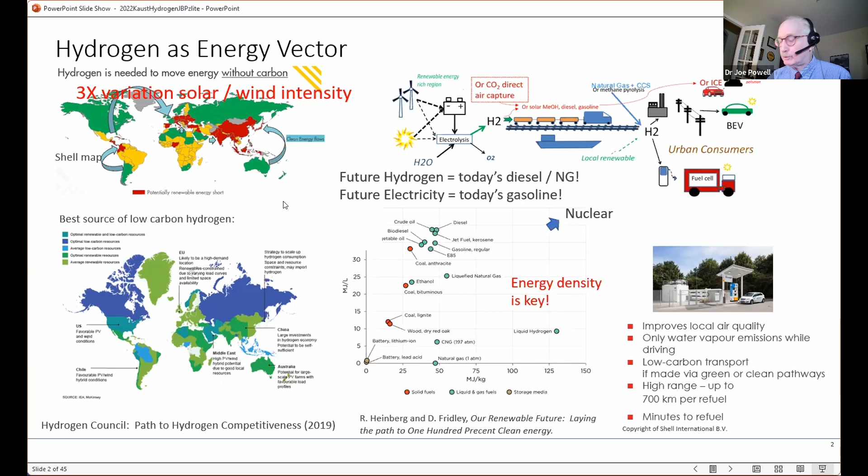So the decision for industry is whether to invest in the blue or the green, and how are you going to move energy into markets. The key point is the energy density of hydrogen and its carriers is much better than trying to move energy, especially the renewable electrical energy, via batteries. So the vector is the key point.

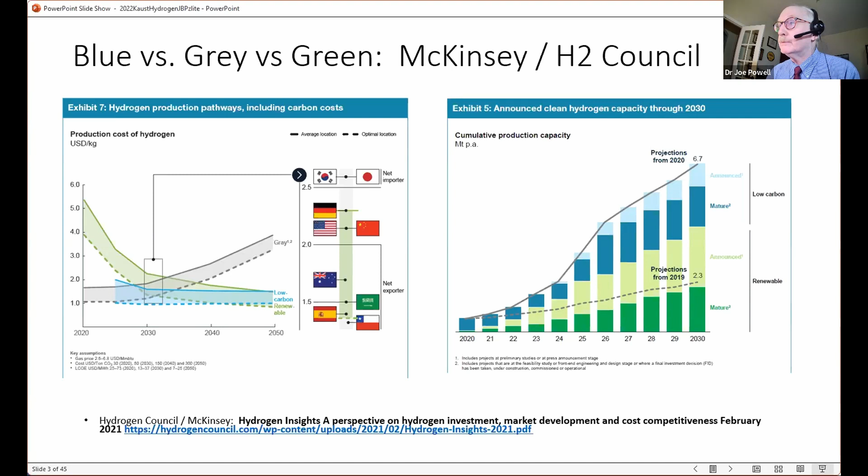So if you look at this 2021 report, on the right-hand side, they are estimating, based on the projects announced, what is the capacity going forward in terms of green and blue as we make this transition into 2030. But the benchmark price there on the left-hand side is $1 per kilogram of hydrogen, and electrolysis may be perhaps 3 times that today, but coming down rapidly. Here's some further breakdowns in the numbers - again, gray on the left, blue in the middle, and green on the right.

And you see that carbon tax coming into play by 2050-ish, according to this analysis. The gray is certainly mature. Blue, natural gas reforming, is mature technology with CCS. And the green is still developing on an S-curve and coming down in cost. So that is the dilemma from the investment side.

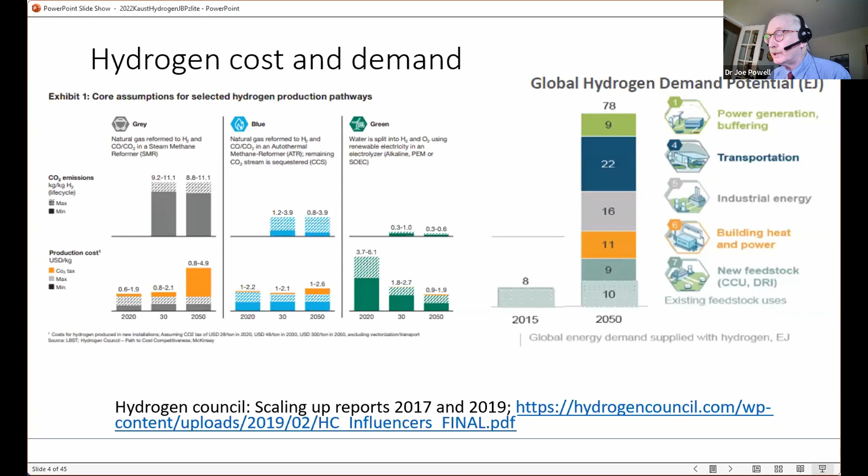On the right-hand side, you see that growth in demand. So again, hydrogen is going after new markets: transport, industrial heating, residential, et cetera. And that explains the tremendous growth anticipated in future demand.

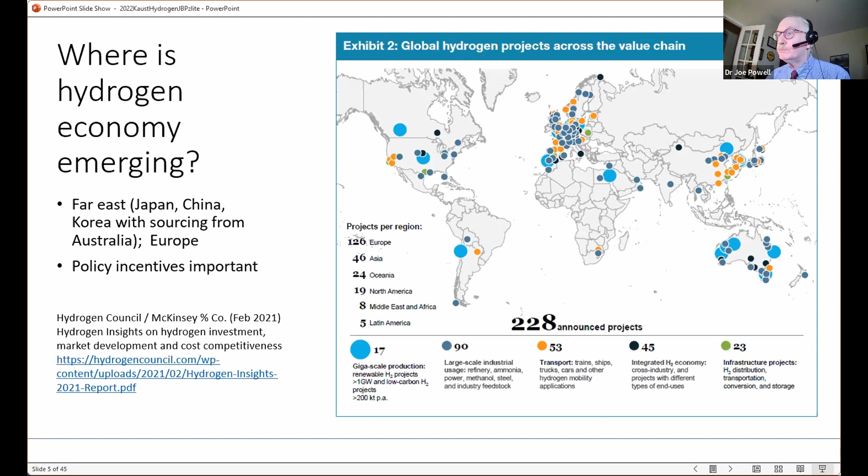This particular publication says 228 announced projects for the year 2021. That may have been more like 370. So there's just quite a bit of project and investment scouting going on in the hydrogen space.

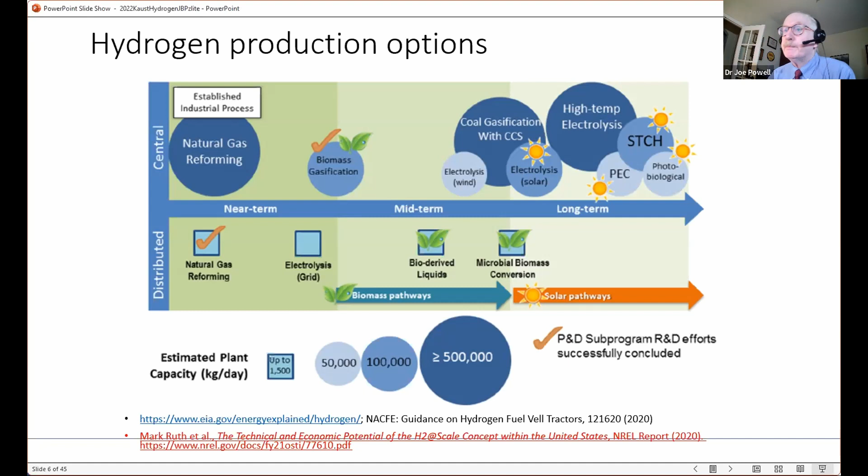Now, I'm going to be talking today about natural gas reforming, biomass and coal gasification—some of these large centralized ways of producing hydrogen today. You can, of course, also make it in a distributed manner, and electrolysis in particular plays out well there. And there are other ways to make hydrogen as well, but we will focus on natural gas reforming and some of the other gasification routes.

Important to keep in mind: it takes less energy to reform or split hydrogen off of methane. In terms of kilojoules per mole, it takes a lot more energy to split water via electrolysis. However, if you're reforming natural gas by steam methane reforming or methane pyrolysis, which we'll talk about shortly, it takes less energy, but you have to be able to sequester or use the carbon into products. We'll also talk about partial oxidation, where you're actually partially combusting the natural gas in addition to making the hydrogen, using that to export energy and provide your process and utilities heat.

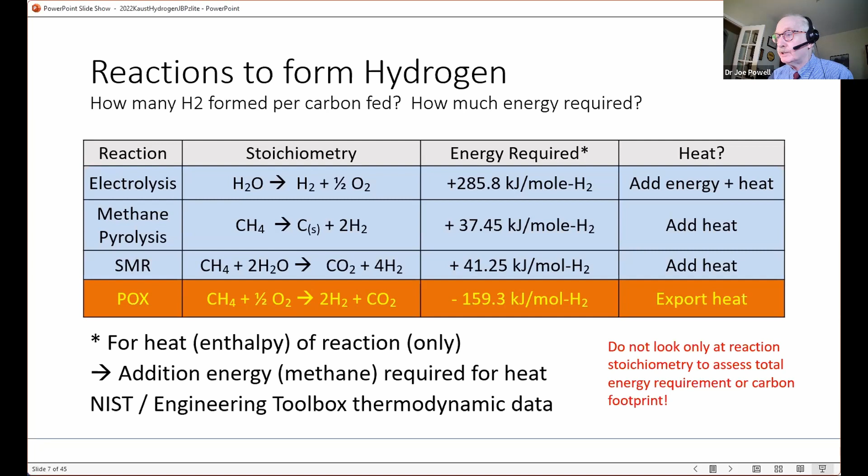Some key references to have if you're working in this space: you want to grab the IEA greenhouse gas report from 2017, which is sort of the standard for techno-economic analysis on steam methane reforming—very good reference there, process from Foster Wheeler. And then also a good one from the United States is this techno-economic potential of hydrogen at scale within the US, which covers the economics of the various plausible routes to hydrogen—very good sources of technology and economics for those routes.

When you look at hydrogen reforming from natural gas, it's essentially a large furnace—a furnace with many tubes running down. So you're really applying natural gas not only to the process side but also to the furnace side of that unit. If you move to something called autothermal reforming, you're actually blending oxygen in with the process side and producing the heat in addition to the process chemistry in an integrated manner.

And then again, if you go to partial oxidation, or what Shell would call gasification, you're adding excess oxygen so that you can not only generate hydrogen but also produce steam and electricity.

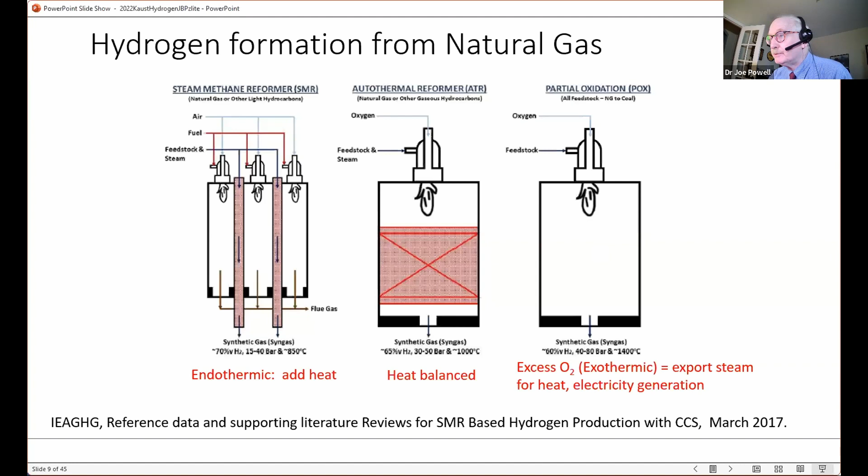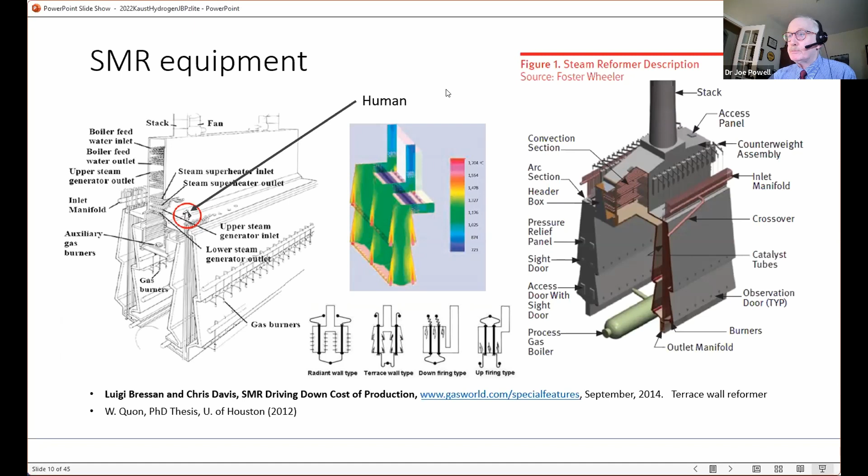So the red circle here shows a person on top of a steam methane reformer furnace. These are huge units. You see some of the temperature profile here and a little bit of what that equipment design looks like. In terms of the tubes, this particular example had 900 tubes, about 10 centimeters in diameter.

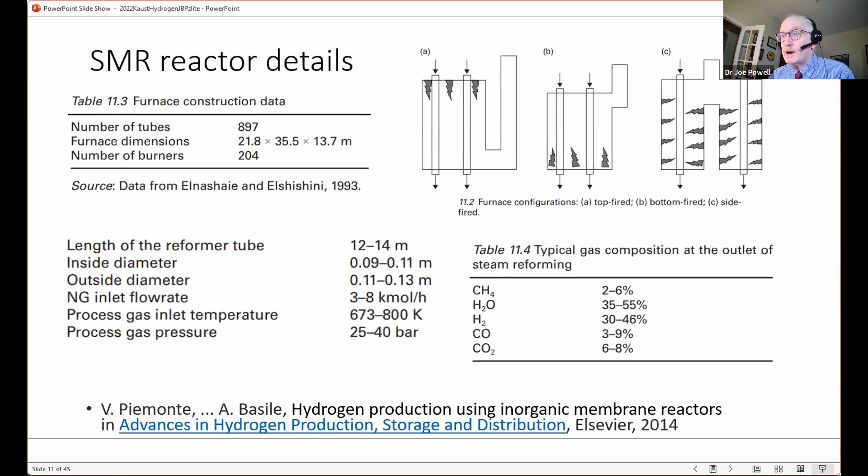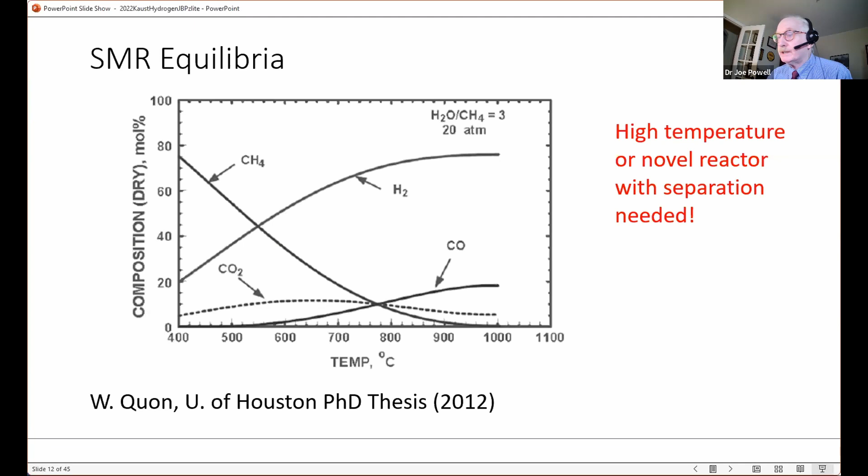And when you're running this reforming reaction, you do leave a little bit of carbon monoxide in the off gas. So you have to run the water gas shift reaction to fully produce all of the hydrogen available from the natural gas feedstock. It's an equilibrium limited reaction, so it needs to run above 750 degrees C to drive to high concentrations of hydrogen, or you have to have a novel integrated separation technique to drive that equilibrium if you want to do a sorption enhanced play or the like.

Catalysts: nickel catalysts are used for steam methane reforming, and then different iron oxide, chromium, or copper catalysts are used for the various stages of water gas shift in order to complete the conversion of the carbon monoxide intermediate over to hydrogen.

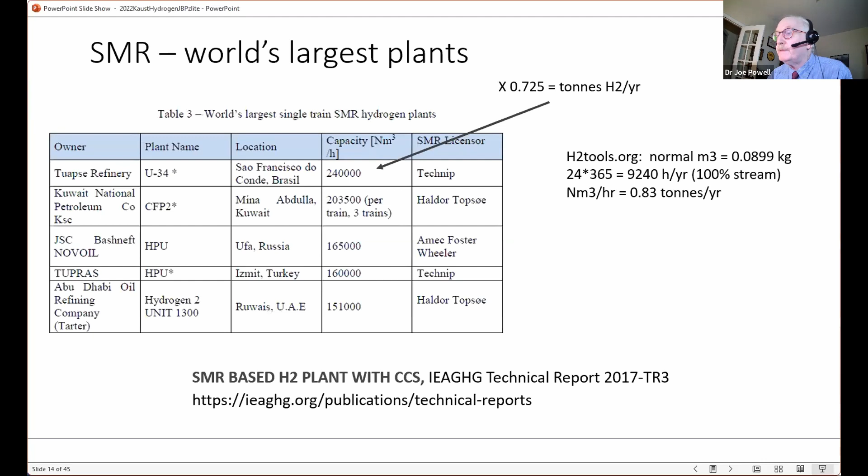World's largest plants—a couple of them in the Middle East, in the UAE, and then also in Kuwait. Here's another one listed in Brazil, Russia, and Turkey, but these are very large scale plants.

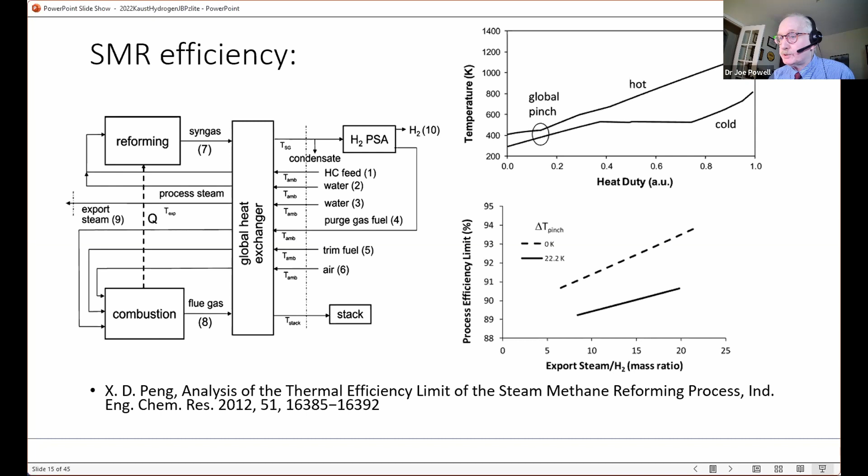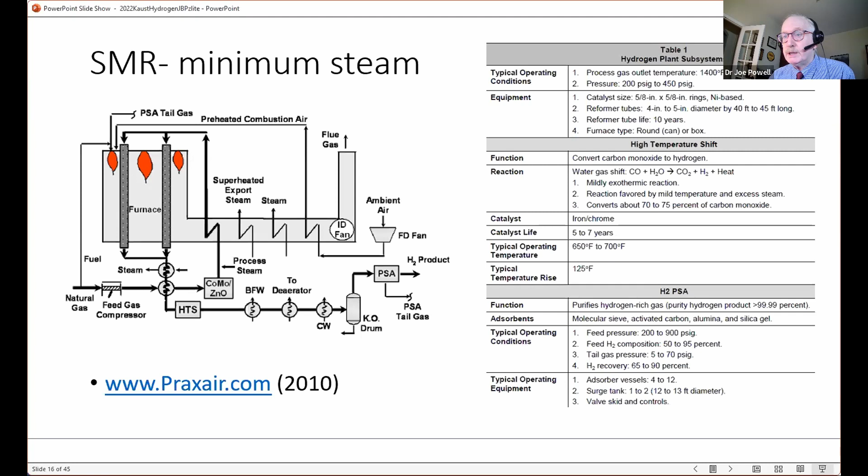One of the best papers—a lot of the cost information and detail is proprietary by the vendors—but a very good paper from Parkinson at Imperial College gives their own estimates of what the various hydrogen cost technologies are, but also compares the literature estimates from the SMR, the gray hydrogen, the SMR with CCS, which would be the blue, coal gasification, methane pyrolysis, but also biomass that I'll talk about today, and then electrolysis. These were the numbers before inflation hit, from about two years ago.

So now you really have to consider the local natural gas prices in more detail, and the dropping prices in wind and solar, in order to make these comparisons. But overall, SMR with CCS is at the lower end of the cost of production.

Here's an optimistic projection for methane pyrolysis. Biomass runs a bit higher and is smaller scale in general. And again, electrolysis is coming down in price because of developments in electrolyzers and improvements in solar and wind power costs. Nuclear can be lower cost, but usually you need to be running sulfur iodine cycle, some of the more complex nuclear technologies, and not the steam reformers.

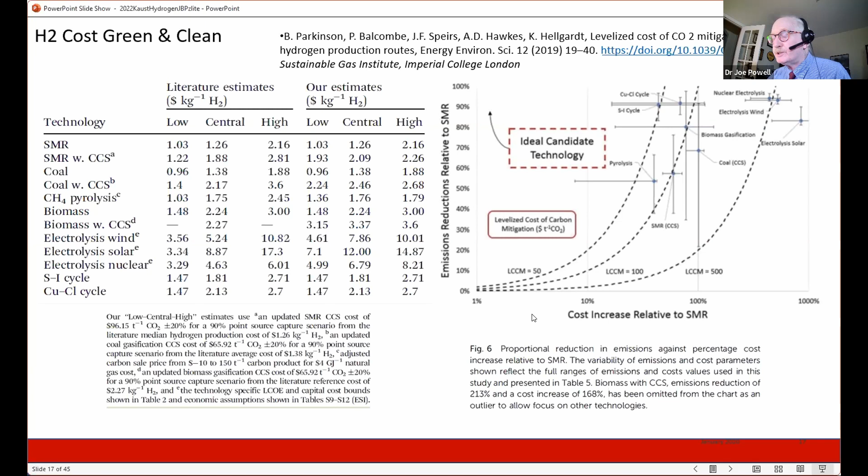These costs are highly dependent on how much decarbonization you're getting. So when you're looking at blue hydrogen especially, you have to ask, well, how much CO2 reduction is coming into play there?

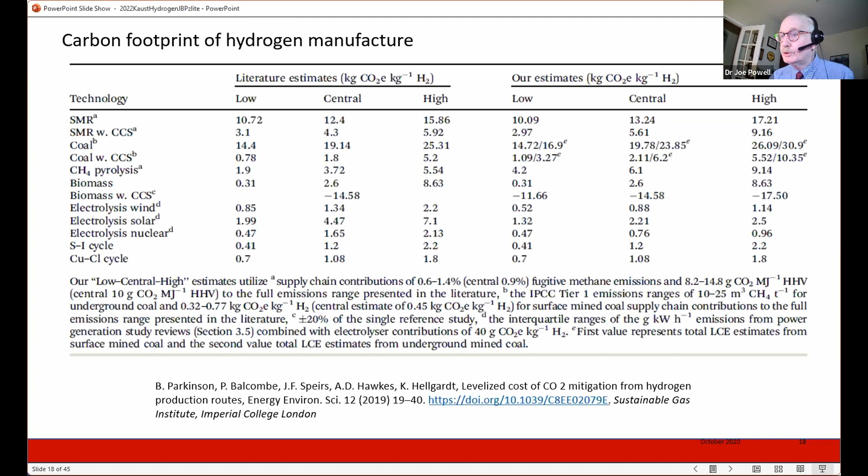If you look overall, steam methane reforming produces about 10 kilograms of CO2 per kilogram of hydrogen. So you're looking at carbon capture and storage in order to reduce that and drive it into what is considered a clean hydrogen regime.

You can also consider where you're going to capture CO2. In an SMR process, steam methane reforming, you have a furnace side providing the process heat, and that generates one set of CO2. Then you have the process side, which is generating CO2 in the process itself. So you end up having to capture CO2 from a couple of different points.

The process side is the easiest to capture, and a number of people are doing that to partially decarbonize. But getting to a high level of decarbonization, 90%, is a bit of a challenge.

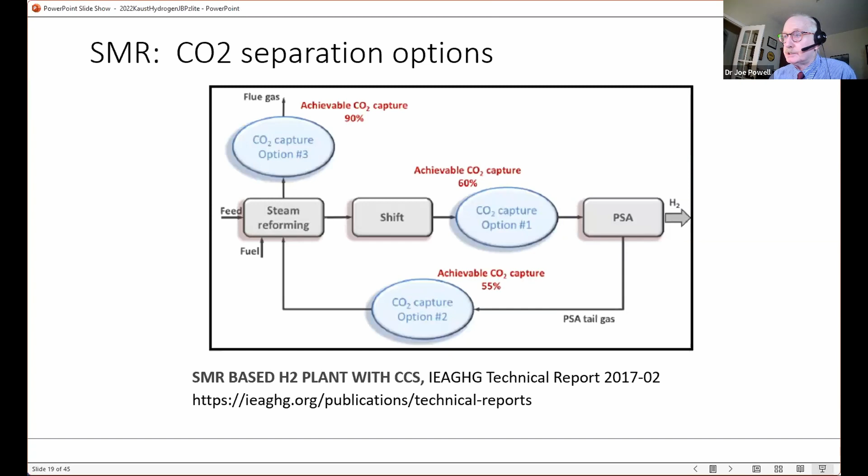Here's some numbers on what the Shell process SMR in Scotford, Canada is looking at. They're taking it after the high temperature shift reactor, before the PSA—this was chosen quite a bit because of the advantaged pressure situation and CO2 concentration.

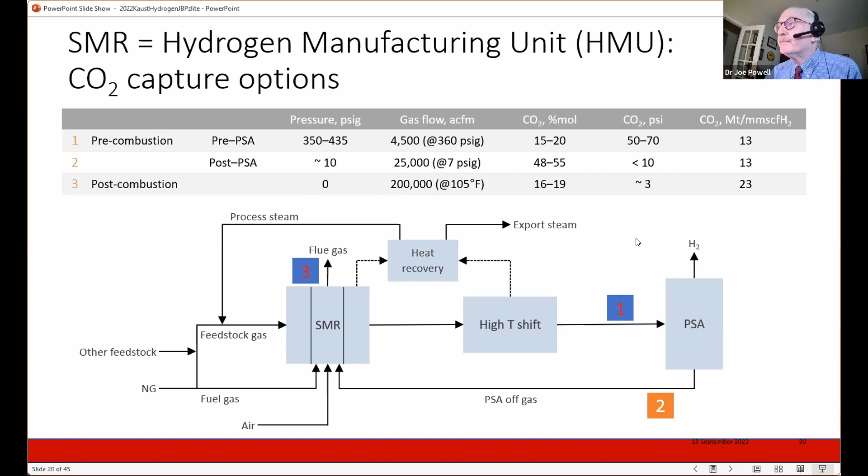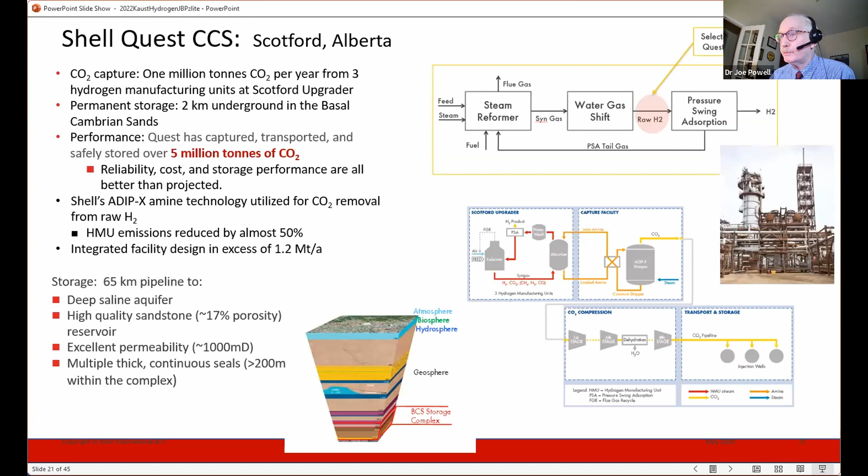Comparing the different approaches—blue hydrogen, again, you can do SMR, but you'll have to capture CO2 from a couple of different places if you want a high level of decarbonization. With autothermal reforming, you add just enough oxygen in the feed so that it becomes energy neutral, and you don't have to run that external fired furnace.

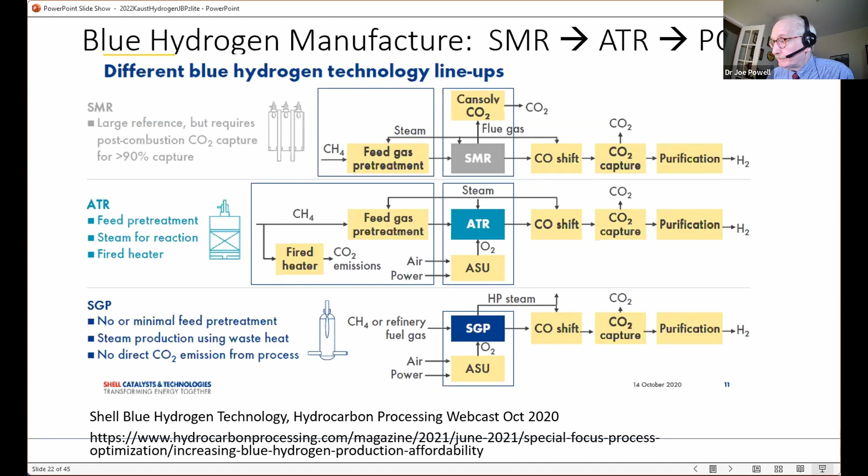If you go further and do shell gasification or partial oxidation, you're actually adding an excess of oxygen, so not only are you producing all the heat you need for the endothermic reforming reaction in the process itself, but you're also exporting steam to run all the process utilities.

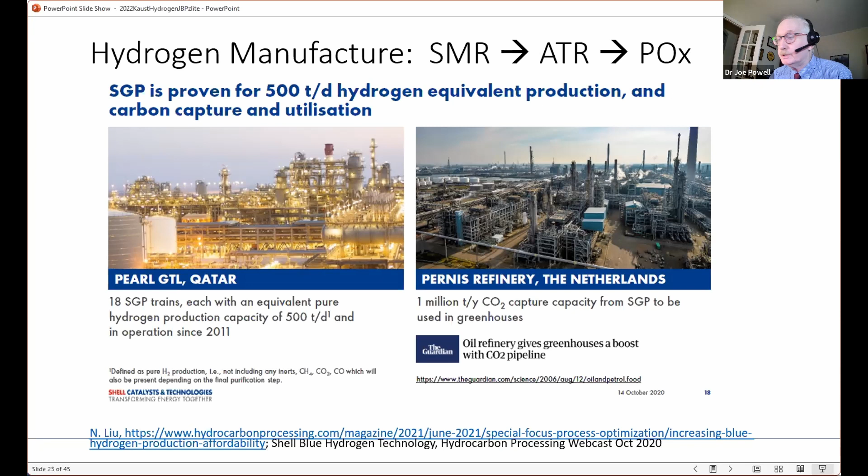Shell practices gasification at some of its large units, the Pearl gas to liquids unit in Qatar, also in the Pernis refinery. So it's known technology. Looking at it from a greenfield investment point of view, there are advantages in doing the partial oxidation—it's non-catalytic, direct heating, and again you can generate all the power you need to run the process and combine that into your CCS unit.

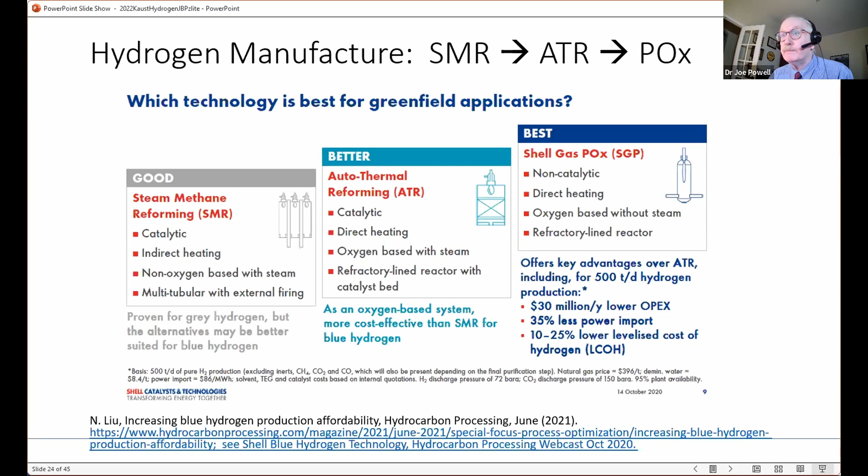So when Shell looks at the numbers, they see a bit lower OPEX for the partial oxidation approach to future hydrogen. The key point is that if you're going to be removing CO2 from your hydrogen production, then the ATR and the partial oxidation are advantaged technologies relative to steam methane reforming, unless you do something else there.

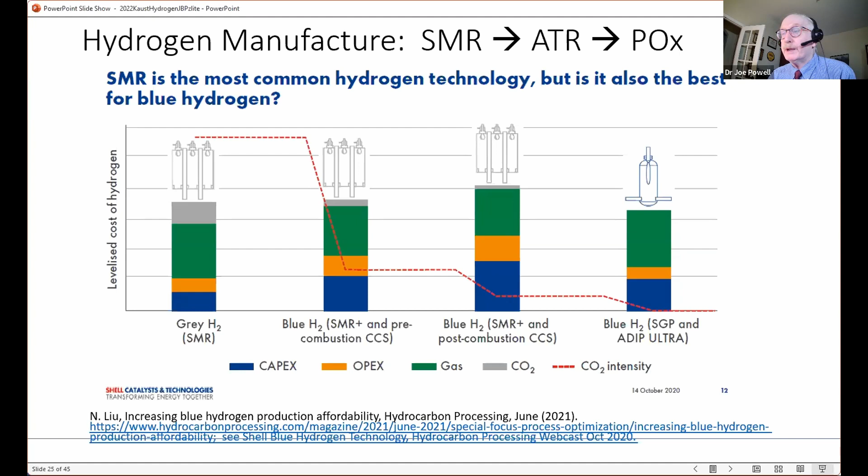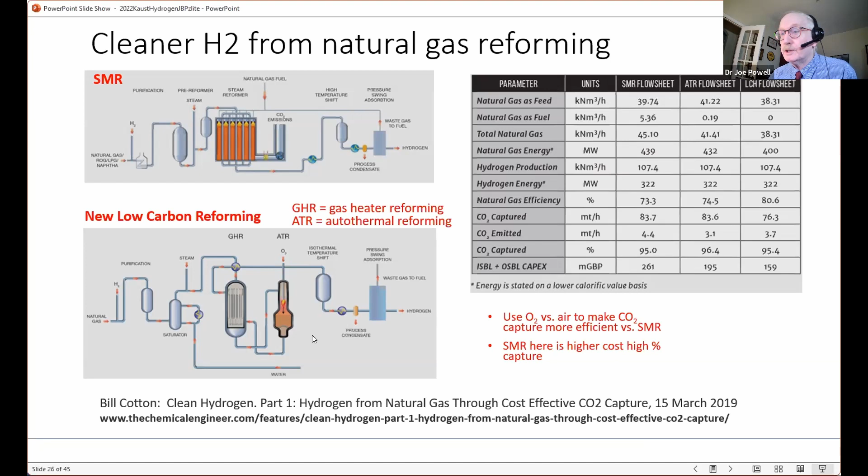One of the things you can do with steam methane reforming is actually add a partial oxidation step in series with your reformer, which is discussed in this paper from IChemE. So that might be involved in a retrofit opportunity.

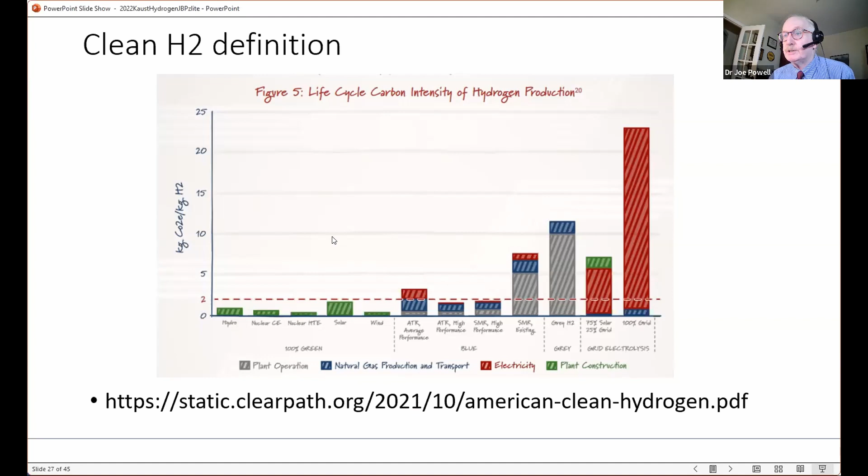Keep in mind that the indirect global warming potential of hydrogen has been increasing according to scientific studies over the last decade or so. It's now not considered totally inert or zero, it has a global warming potential of 11. And hydrogen leakage rates are becoming a concern.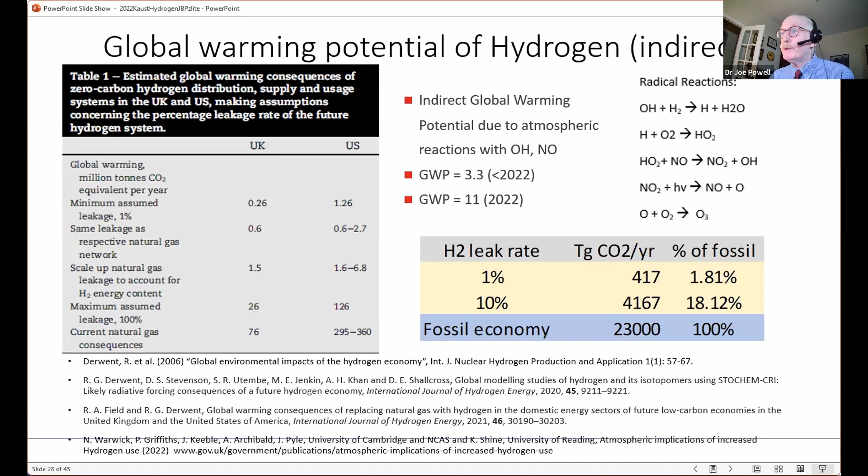If you replace the entire fossil economy with hydrogen as a carrier at a 1% leakage rate, that would back off about 2% of the value of that decarbonization. If the leakage rate is higher, with these newer global warming potentials, that can be up to 10%. This means there's a move to consider more distributed production of hydrogen, and really worry about distribution methods and pipelines in terms of leakage. Some stakeholders are giving pushback on how you handle that hydrogen supply chain coming off large central units. So that needs to be taken into consideration.

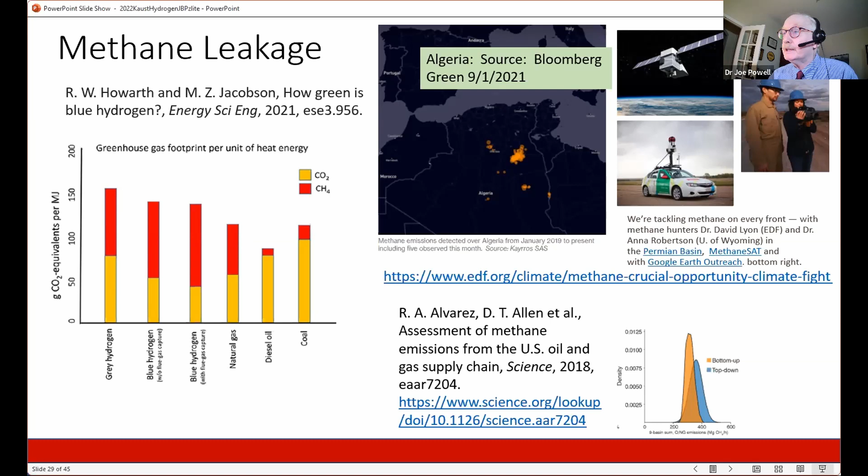Another issue is methane leakage. Beyond the process itself, you have to consider the greenhouse gas impacts of methane emissions, which can have a global warming potential of 25 times CO2 on a 100-year time frame, or up to 100 on a 20-year time frame. A lot of stakeholders are pushing back on what that supply chain looks like, and this can be especially difficult if you're producing gas through unconventional methods like fracking. So that's something the industry needs to get a hold of.

We have a paper here from the EU and the US.

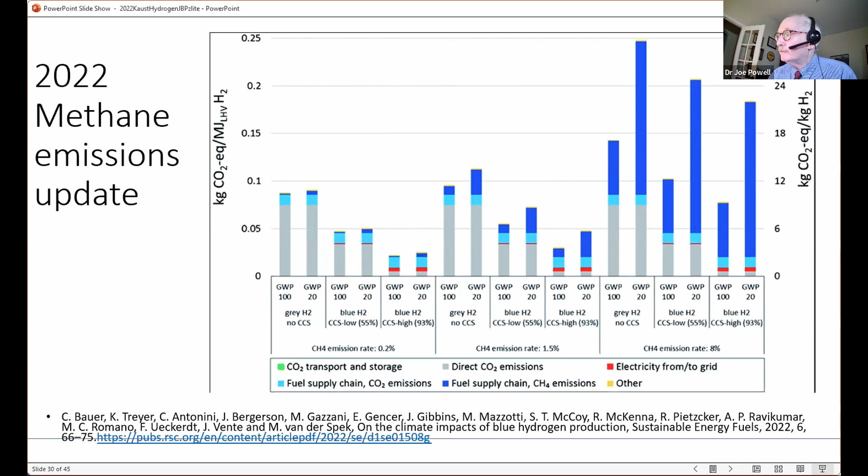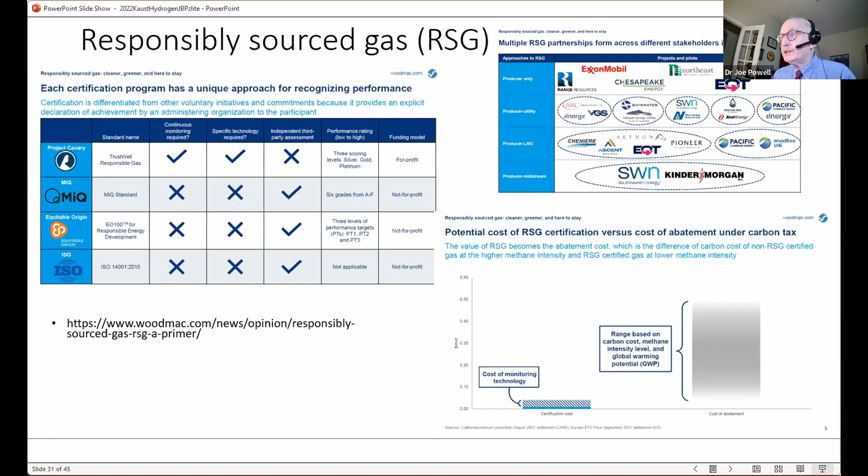Methane emissions need to be actively considered, and it's a challenge for blue hydrogen, such that you really need a high percent capture coming off the POX, on the order of in excess of 90%, in order to achieve the clean hydrogen targets. To do that, organizations are forming around responsibly sourced gas to certify methane emissions along the supply chain to the natural gas reforming plant.

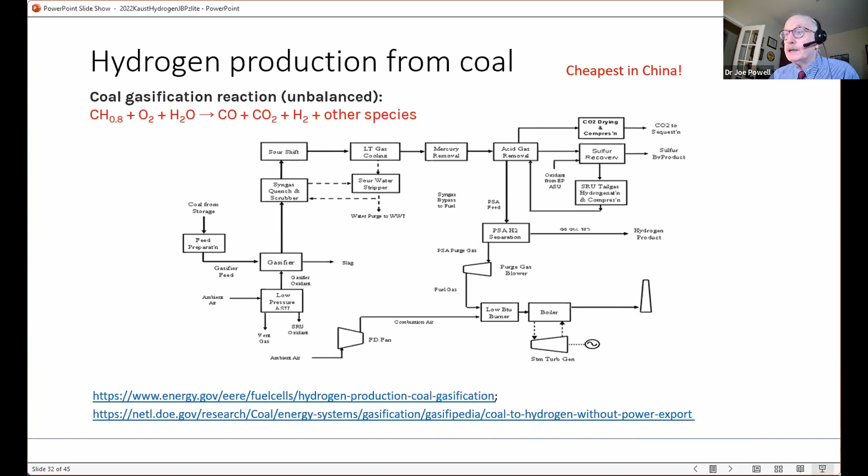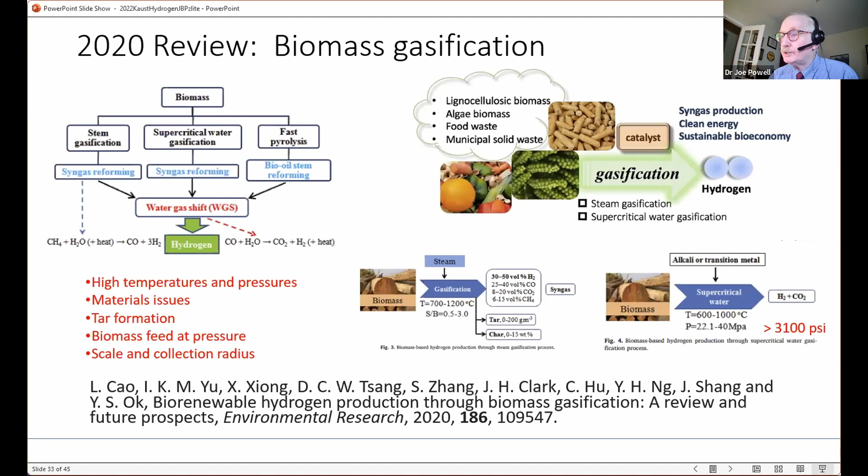As mentioned, you can also gasify coal, which is done quite a bit in China, and use that for hydrogen production. Biomass is similar and presents some new challenges. There are multiple routes for gasifying biomass, and you're introducing oxygenates into that equation. It's surprisingly difficult because of tar formation in biomass gasification.

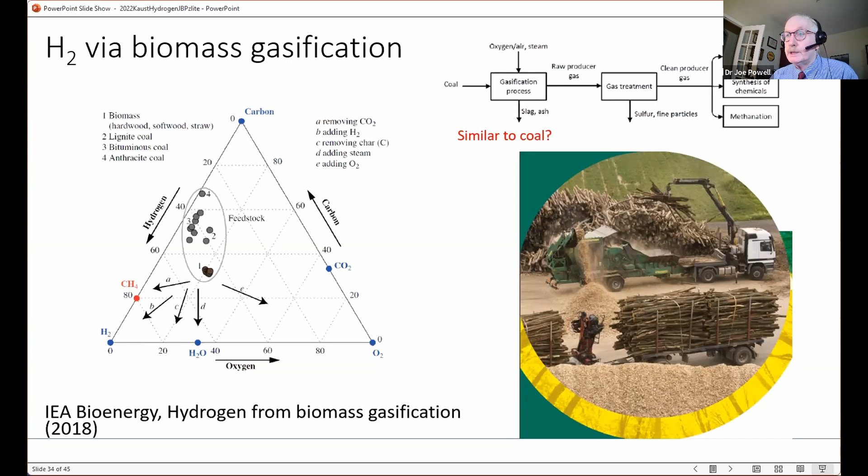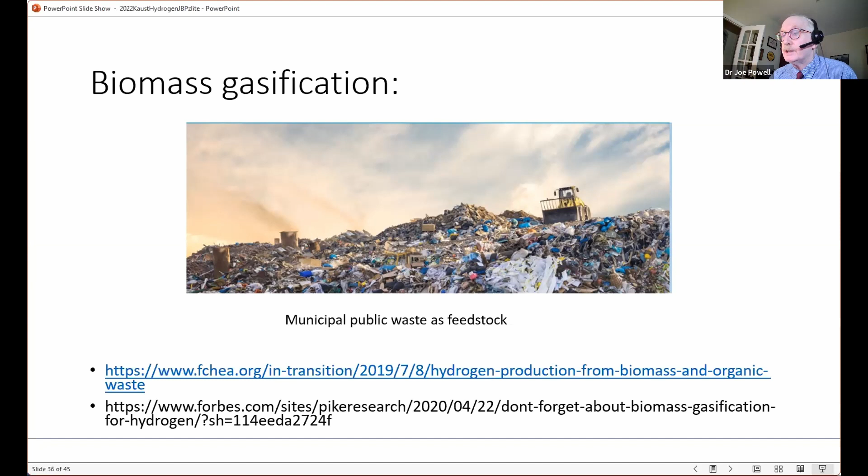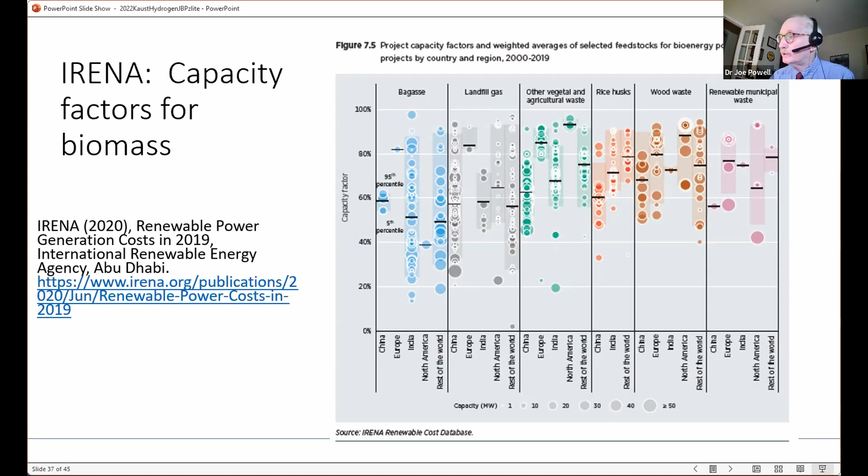To get to reasonable scale, when we were looking at biofuels, you needed about one truck a minute unloading from the resource to develop a world-scale plant. So these are complex technologies involving multi-phase reactors in biomass gasification. You can also consider landfill waste and its bio components as a future hydrogen source. Capacity factors for biogasification are higher than renewable energy from wind and solar in most parts of the world, which is one of the attractive features of that feedstock.

Methane pyrolysis is another approach. Instead of making CO2, you can split methane into solid carbon and hydrogen. Those solid carbon products could become carbon fibers for 3D printed automobiles or advanced housing.

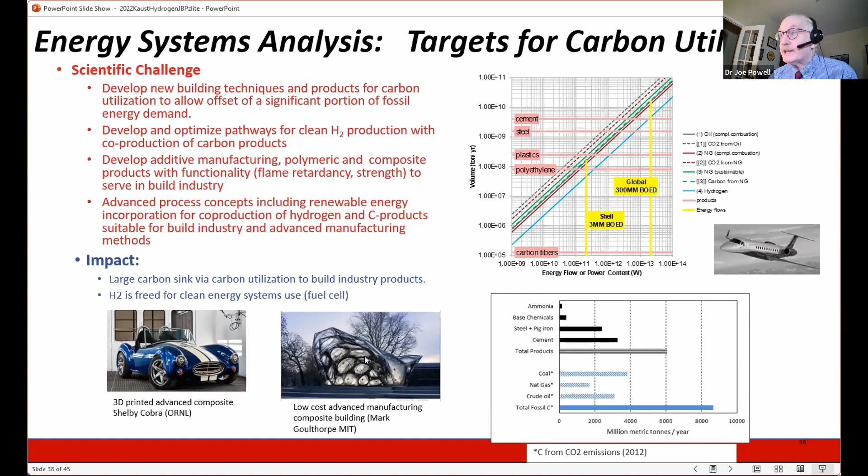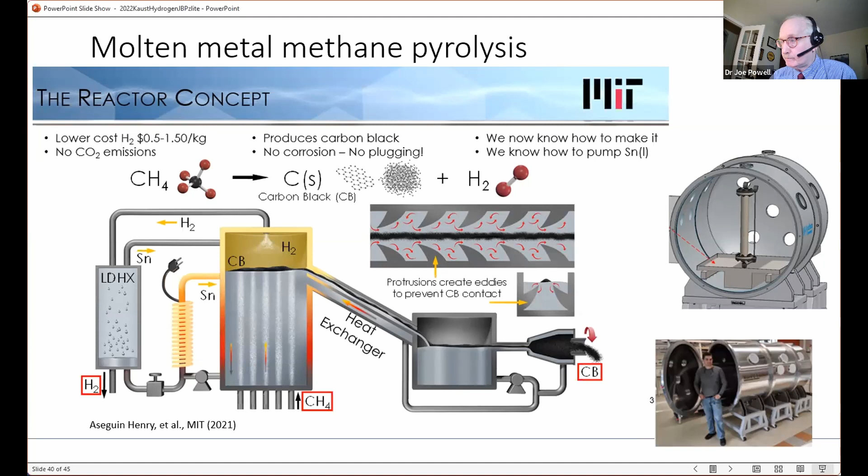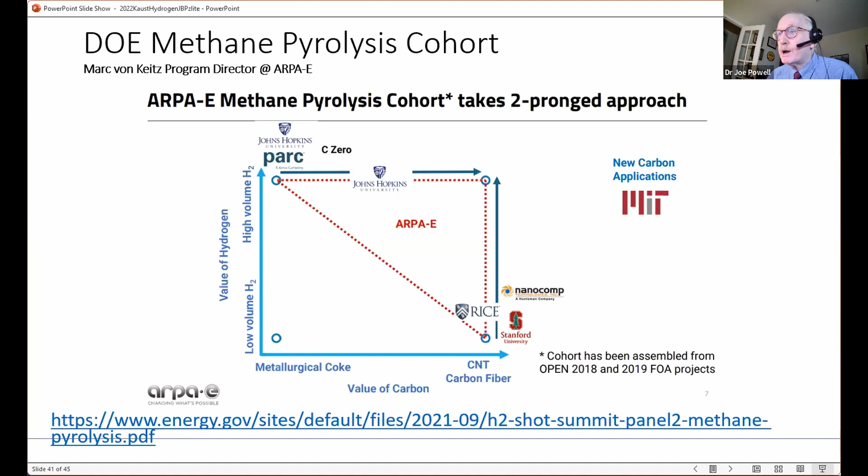C-Zero is one company doing that using high temperature molten salt configurations. Karlsruhe KIT has been investing in the liquid metal approach, as has MIT, which presents a real materials challenge. You can reach very high temperatures there and drive the conversion reactions well, but the materials challenges are significant. The DOE has been sponsoring work in that space, both to make large volumes of hydrogen with carbon black as the product, and smaller-scale conversion to make structured carbons for building materials or R&D. So there are a number of companies and entities pursuing methane pyrolysis.

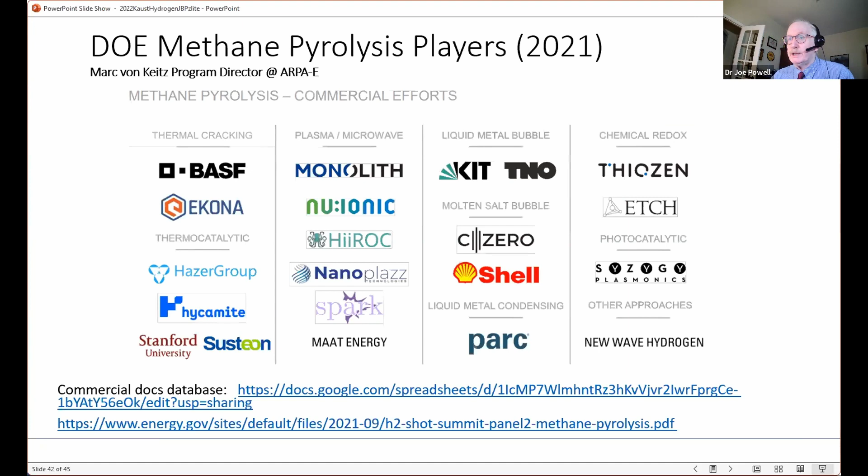It's a great technology for places where you don't have the ability to sequester carbon. And Monolith, a plasma company, received a $1 billion loan guarantee from the US government to develop methane pyrolysis and carbon black co-product in the US.

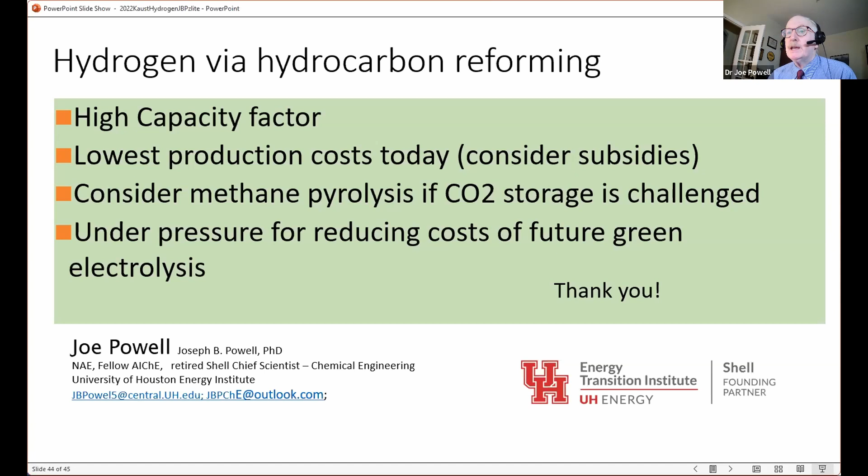So that's my talk today. Hydrogen via hydrocarbon reforming: you can get to high capacity factors, 24/7 operations. It has the lowest production costs today. Methane pyrolysis can be considered where you can't do CO2 storage. And certainly it's under challenge because of the reducing costs of future green hydrogen by electrolysis, which you'll be hearing from next. So thank you for listening, and I'll turn it over to you, Chris.

So quickly, just the company: we've gone through a lot of iterations, as you do over 25 years, where we've been sold, we've been bought, we've acquired other companies. Our most recent development was back in 2017, where we were acquired by Nel Hydrogen, a company in Norway that specializes in alkaline electrolysis. They purchased us really as an asset to expand their portfolio.

My location in the United States focuses primarily on proton exchange membrane electrolysis, at a little bit of a smaller scale than alkaline can deliver right now, but we're trying to close that gap significantly. One of the other purchases our company made was a compression, storage, and dispensing company, so we could really have the full portfolio of options available for the customer.

So not only do we have multiple technologies for hydrogen generation through either alkaline or proton exchange membrane electrolysis water splitting, but we also have a fueling company located in Denmark that builds the actual infrastructure to be able to supply fuel for light-duty vehicles and heavy-duty vehicles.

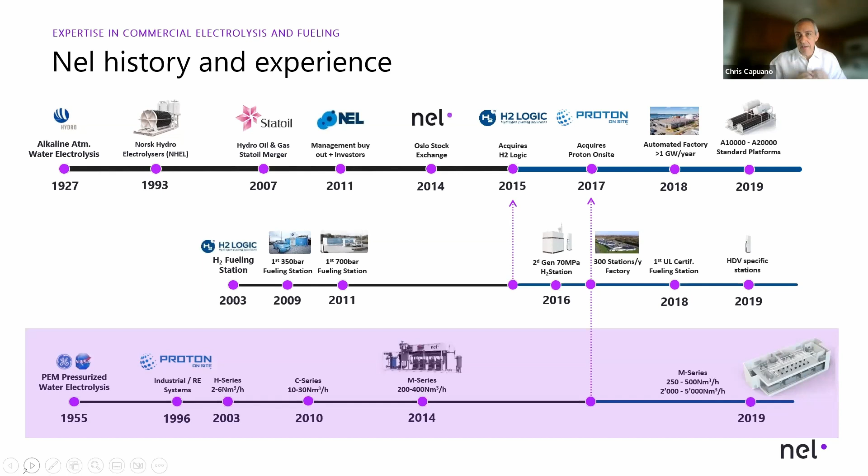So the two technologies: one of them is liquid alkaline based. It's a very old technology, well known, well understood. There's still some opportunity to reduce cost there. The reason it's so intriguing right now is because of its ability to meet scale — we routinely get 100, 200 megawatt orders for this technology. The drawback is that it has to use a pretty caustic electrolyte, and the scale and footprint are very, very large.

Where the proton exchange membrane technology comes in is that it can run at much higher current densities, meaning you can get a smaller form factor for these sites, but also run it at a much, much higher current density, which allows you to significantly reduce your capital expense for the same rate of hydrogen production.

The drawback is it still uses pretty expensive materials. Because of the low pH acidic environment, we're limited by the materials of construction — typically a lot of the metal separators we use are formed out of titanium. The catalysts, as we know them today, are primarily platinum and iridium, although there's significant research being done by our Department of Energy, ARPA-E, and other agencies to try to understand how we can maintain the same activity of the platinum and iridium materials but swap it out with materials that are a little bit more readily available and cheaper. The work is still ongoing — there's a lot of work there to close that gap.

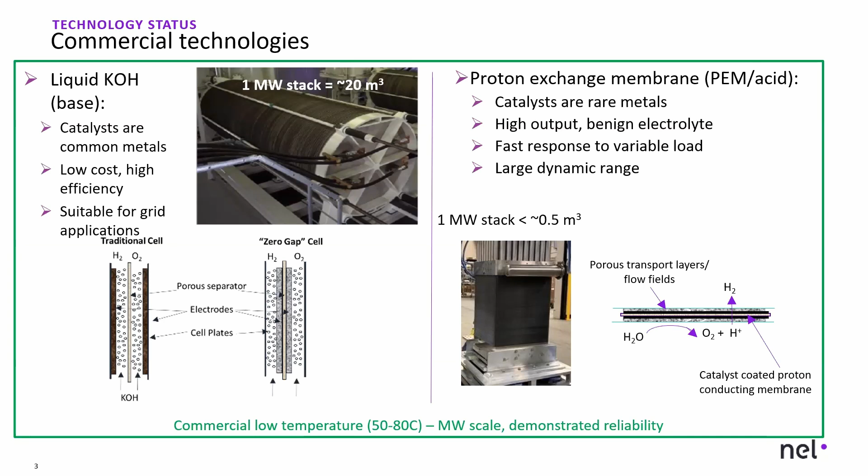So just two real quick images of these large scale installations that we talked about. I mentioned that the alkaline technology is pretty old. The picture on the left shows an installation done back in the 1950s, 135 megawatts, tied directly into a dam, powered by hydropower. We've been able to leverage that base understanding of manufacture and scale and apply it to the growth we're trying to experience on the proton exchange side of things.

What that's manifested in is this installation on the image on the right. This is the plant I was lucky enough to lead the concept development and deployment of over the past couple of years, as I was pulled out of the research group to lead this. It's a 20 megawatt installation, making about 4 tons of hydrogen a day when fully running, tied into a 100 megawatt photovoltaic array, producing 100% green hydrogen to an ammonia synthesis process on site.

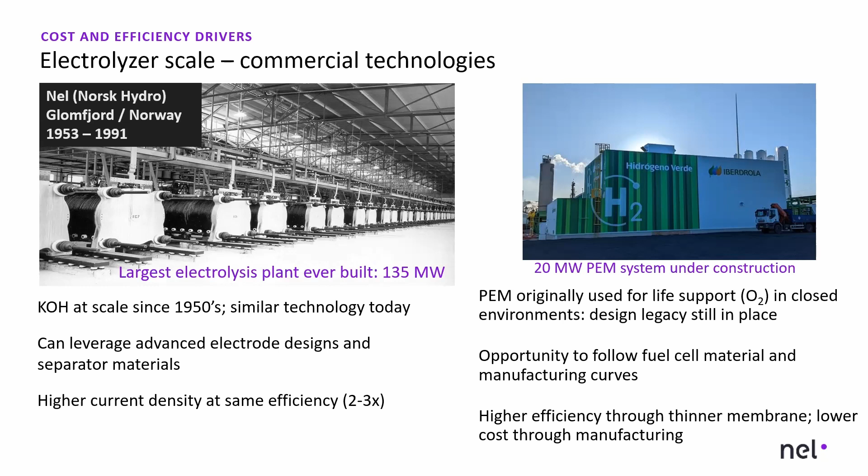20 megawatts sounds large, but they're still viewing this as a demonstration of the technology. We really think we need to get this into the hundreds of megawatts to provide a 100% solution to some of these industrial processes that require hydrogen, and we're trying to do that entirely green. As of right now, the plant's been fully commissioned, the keys have been handed over to the customer, and everything seems to be going okay.

Our base business here is really pretty broad. We've been fortunate over the past 25, 26 years to produce equipment providing hydrogen for industrial applications while we waited for these emerging markets and energy capture to take shape. That's allowed us to focus on the durability of our systems and improve the life of the overall devices. Now our systems and our competitor systems are all expected to run about 80,000 hours over their entire life, so durability is really, really key.

Now that we've demonstrated 8 to 10 years of continuous life running 24/7, we're starting to look at efficiency, because that's an area we historically haven't been challenged on when selling hydrogen or these systems as an industrial gas provider. But it's very critical when we tie into renewable sources to improve efficiency, which ultimately helps drive down cost, because the total cost of ownership is more heavily weighted on operating expense and electrical expense over the life of the system. It's probably as high as 60% of the total cost, with the capital purchase being the other 40% or so.

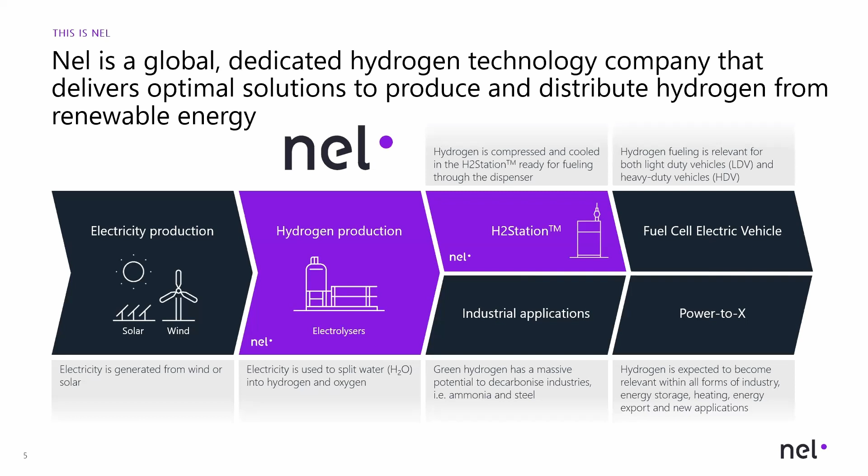Our facilities are located in 3 different areas across the world. The place I'll be going to shortly after this talk is about 10 minutes from where I live in Wallingford, Connecticut. We do all our proton exchange membrane research there, as well as manufacture of our industrial products. We've delivered over 3,000 units to date, probably closer to 3,500, with an internal capacity to scale up to about 150 megawatts annually without any changes to infrastructure. We currently only run 1 shift, 8 hours a day, and we're able to do 50 megawatts a year.

Our facility in Norway is our first automated facility, just commissioned earlier this year. It has the ability to do 500 megawatts of alkaline electrolysis a year, and the building can be scaled up to 2 gigawatts a year. We just got approval from the board of directors to add another 500 megawatts, so in a few months the facility will have the ability to do 1 gigawatt of electrolysis a year. Our facility in Denmark exclusively does fueling, where we can do 300 hydrogen fueling stations a year, including compression, storage, and dispensing.

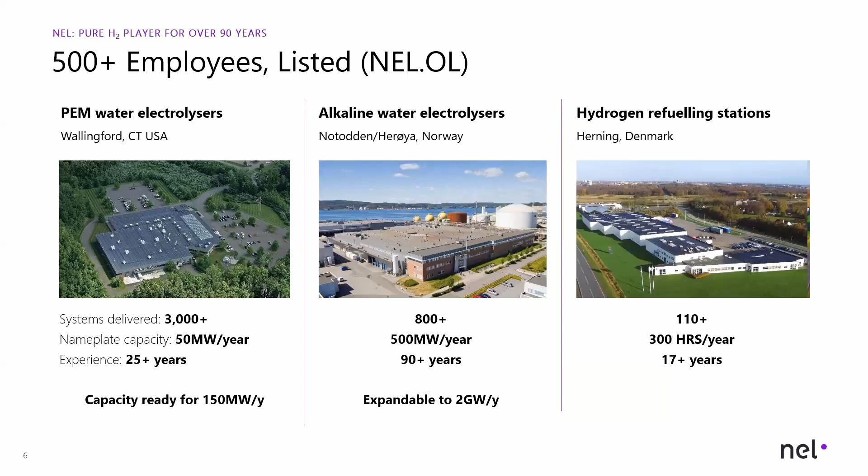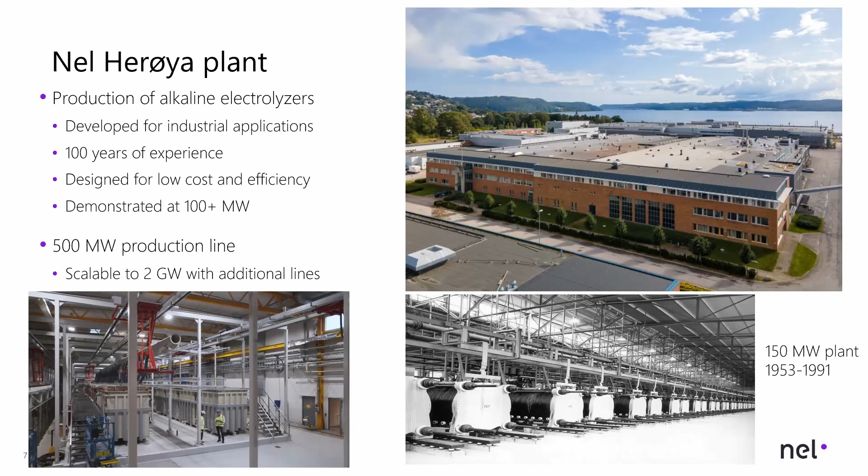As I mentioned, the plant we have over in Norway recently went through a commissioning and christening activity of a new facility that we built, which we're going to use as the model for expansion across all our different facilities as we move more toward large scale automation. You can see the bottom left image, it's a large plant, everything's computer controlled. We have fantastic insight as to where material is, all the way from when it's received as raw material through to when it's packaged into a commercial system going to our customer. I'll show one more picture here, an automated line with robot arms and pick-and-place items to do this in a completely autonomous way, with real-time control and monitoring that lets us track a part all the way through and understand its status and quality.

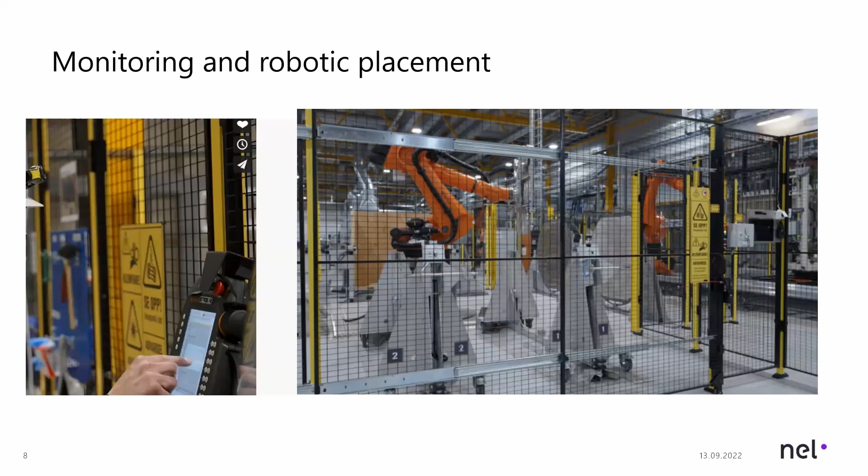I say this because as the research and development director, I primarily focus on fundamental research and early stage development and enhancement of our existing lines. But because we split jobs between R&D and supporting the manufacturing groups, when doing fundamental research we always have a vision of what it needs to look like when it moves to manufacturing. It has to have manufacturability in mind, not just manufacturability but manufacturability at high volume throughput and at scale. So that's always in the back of our head when doing fundamental research: where does this ultimately have to go, and am I designing something that's easy to translate to our manufacturing space?

Now pulling away from the alkaline area of the business to focus more on what I do on the proton exchange membrane side, I'll talk about our location. This building was constructed back in 2001 specifically for us, built with research and manufacture in mind. The chart on the right shows the ramp up of our deployment of megawatt scale technology over the past few years. In the early 2000s, because our systems were much smaller for industrial applications, the amount of deployed megawatt capacity was pretty low. But in the past couple of years, as our systems and orders have gotten larger for some large installations, our deployment of megawatt scale systems has significantly ramped up, and we expect that to grow significantly over the next...

Hello? Yes, hello? We lost you for a few seconds, could you repeat? Oh sure, sorry about that, we have a thunderstorm right now so that's possibly why. Okay, now it's better. Yep, okay.

So I was just saying, the bottom right graph shows how our product line has grown, and we've been able to accelerate the deployment of megawatt systems out into the community as the technology has become more widely accepted and the markets have become larger.

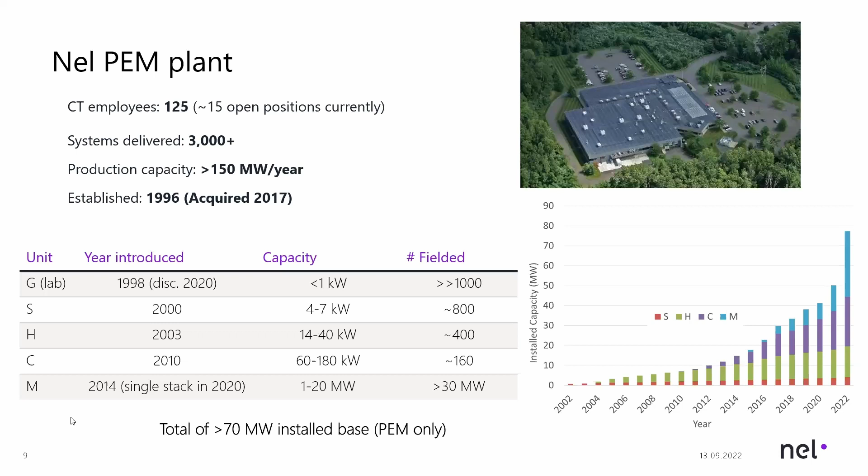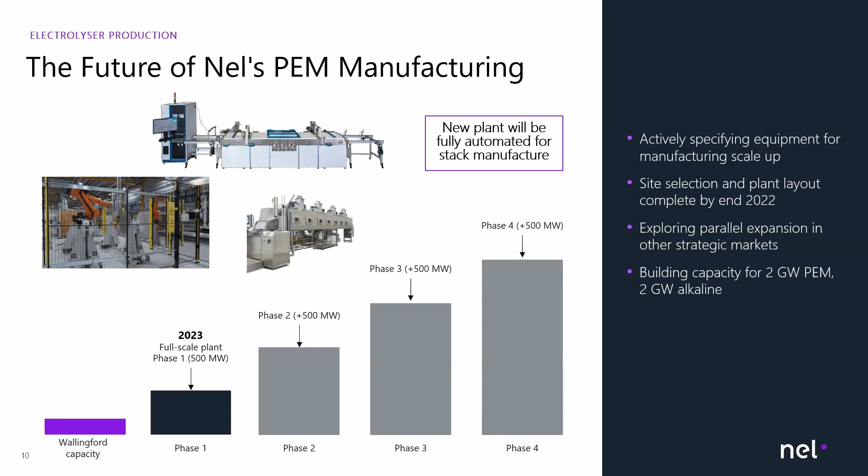So, the future of Nel's PEM manufacturing: we're going to follow the model of our alkaline parent company over in Norway. Right now we're actively looking at a new site within the United States to deploy our PEM automation facility, with the intent of having a location selected by the end of this year. Next year we'll begin the build out, and shortly after, by end of 2023, we'll have 500 megawatts of manufacturing capacity within the United States for our PEM site. Shortly after that, we're going to roll out additional lines to increase capacity, with the goal of reaching 2 gigawatts of automated capacity in the US within the next couple of years.

So what we're doing right now to realize that opportunity is evaluating all of our manufacturing processes. We have older methods that are sheet-fed processes, which can't keep up with the scale and volume we need for our systems. So we're looking at new processes to migrate our existing manufacturing techniques into new, higher throughput, computer-controlled techniques. The top right image shows our current process of making electrodes, essentially a silk screen process where we're depositing electrodes onto a substrate. The bottom right image shows where we're moving: roll-to-roll manufacture of electrodes onto membrane or substrates. Really what you'd think of with a newspaper manufacturing facility, a roll-to-roll manufacturer, with really high throughput of substrate going through as you're applying catalyst ink onto its surface.

Fortunately, fuel cells have really led the way as far as this goes, and we can take a lot of lessons from that. The technologies are starting to really converge, where fuel cells are very well known. They're very simplistic designs at this point, where they've been able to minimize the amounts of components and the different interfaces. Our technology is moving there as well, so we should be able to leverage a lot of the different automation that's been developed for fuel cell capacity already. Now, there's certainly some differences, but there is a lot that carries over.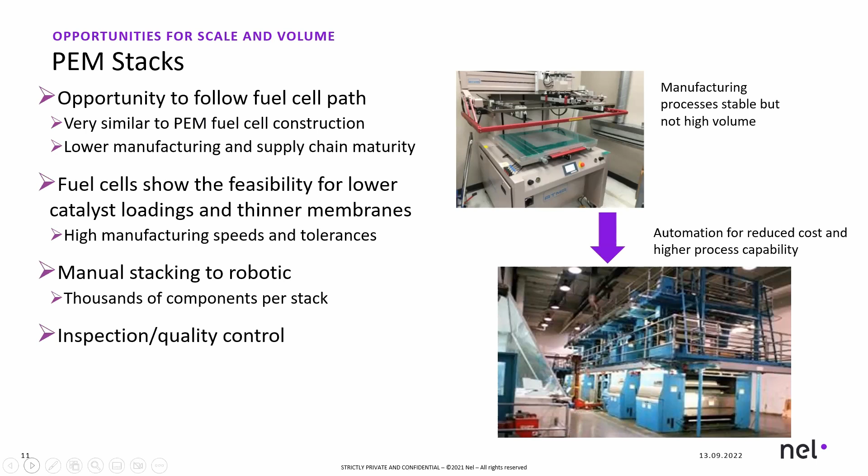So what does this allow us to do? It not only increases our ability to produce higher volume parts at larger scale for components that really can't be handled by an individual operator right now. It has to be handled by large pieces of automated equipment. It allows us to really refine our manufacturing techniques as well.

And so now that we move things that are a little bit more automated, computer controlled, the electrode depositions that we can create can become better controlled. We can make thinner layers on those, stretching our inventory and allowing us to do more with less. And what that ultimately translates into is improved interfaces, reduction of materials used, more consistency, more uniformity.

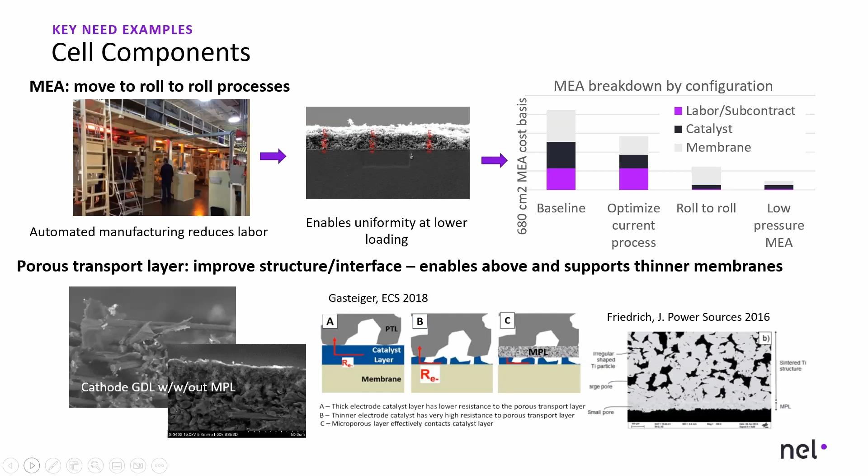So as I mentioned, I talked a lot about automation and large scale, but I do focus a lot on R&D and really fundamental research here that will eventually feed into these systems. And how are we doing that?

So we collaborate with universities quite a bit to help us with a lot of the basic science work, as well as the national laboratories within the United States. And we can serve as the industry partner on there to help guide the research and provide a little bit of perspective as to what technologies we think will work, and which ones might be difficult to translate to manufacture. So we can catch a lot of that early in the process and refine that to try to tune some of these early stage developments into something that's going to be available for industry.

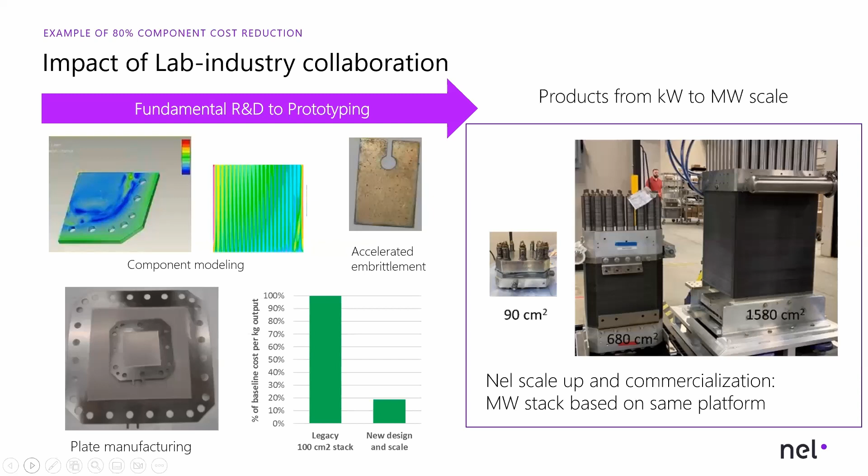But it's essentially a subscale model of our megawatt technology. And so we get very, very good translation when we do development on the small scale, knowing that it's going to be able to move to our 1,600 square centimeter active area devices pretty well. And as you move to that scale, the cost reductions that you have available to you is significant.

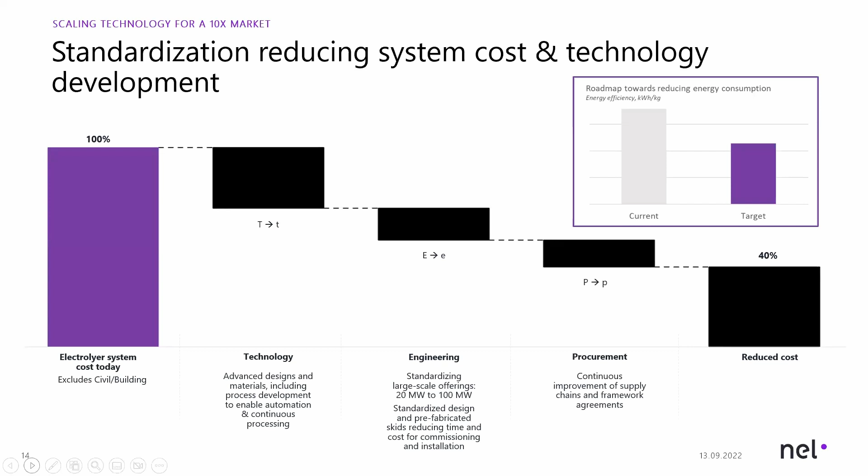We have an internal goal, and we're ahead of it right now, and we're well on track to meet cost parity with steam methane reformed hydrogen by 2025 with some of these scale-up facilities. So we're very, very close right now. In a couple of years, we're going to be competitive with that.

I think I have maybe one slide left. Some of these large installations and the scale of our equipment has allowed us to penetrate some really interesting projects around the world. Could you conclude your presentation in 2 minutes? Yeah, I just have one slide.

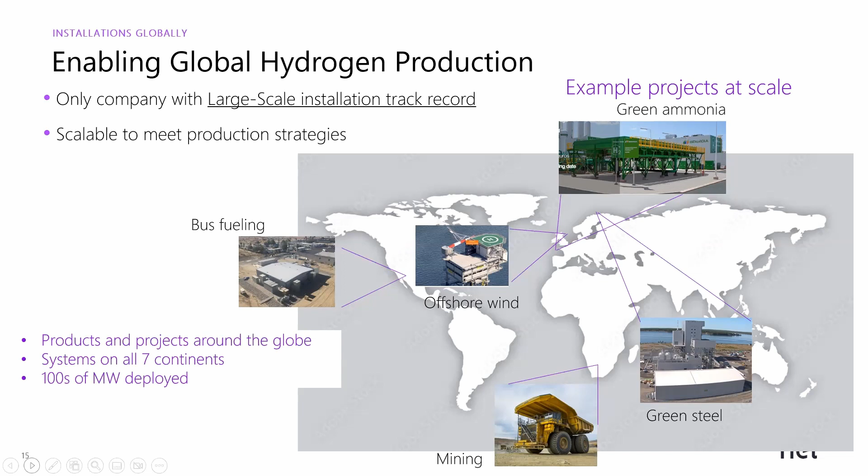As I mentioned, this gives us a pretty large opportunity to serve many different areas of industry. We have the ammonia plant at the top right, which we discussed already, hydrogen for green steel. These are all actual projects we've been awarded, anywhere from 20 megawatts to 200 megawatts of installed electrolysis, offshore wind on an oil rig, as well as bus fueling out in California.

This is the last slide I have, and it's really just a summary of everything we discussed. We're the oldest electrolyzer company in the world. We have the most systems deployed in the world and the most experience out of any electrolyzer company. We have equipment on every continent, so we have a lot of great experience that's allowed us to feed back into our product to further improve reliability. We have really well-defined roadmaps. We see the market starting to take shape, and we're really excited to be part of that. We're trying to position ourselves to get more of that opportunity and really provide a solution to decarbonization.